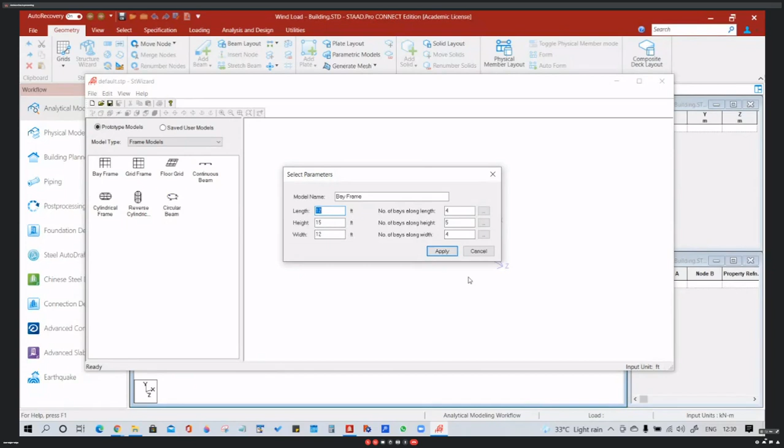You can see the bay frame here. You can drag it here. It will require the requisite parameters for creating a bay frame. So take care of that: these units are all in feet. So cancel this one. Go to the file, select units, and select meter. Then repeat that scenario. Now we are using the meter system.

So let us define a very small frame. Length of 12 meters. Okay, let it be 18 meters. Number of bays along length 3. Height, make it 6 meters. Number of bays along height is 2. And width is 12 meters. Number of bays is 3.

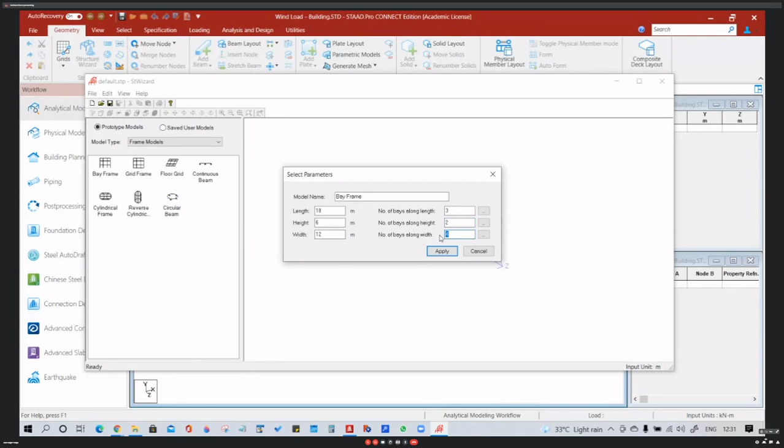So how does it look? It will look like this. Okay. If you don't like this particular geometry, you can also edit it by double clicking on this. You can raise the height up to 9 meters with a number of bays 3.

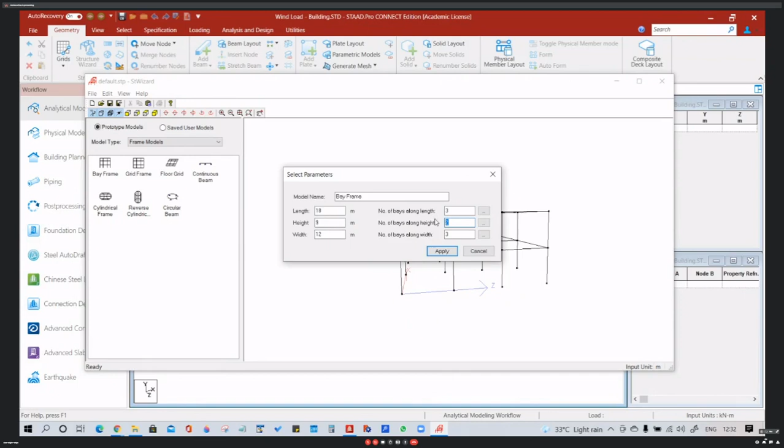So apply it, it will change the model accordingly. So this is a very simple way of creating such models. Okay. Now we have created this model in structure wizard.

Now we need to take this model from structure wizard to STAAD.Pro. From structure wizard to STAAD.Pro, we need to port the model, or we need to export the model from structure wizard to STAAD.Pro. How we can do that? We can do by using this command, transfer model. Here is an icon.

This is transfer model, or we can have the file menu, merge model with STAAD.Pro model. Those are same functions. If you click on that, the structure wizard will ask you, would you like to transfer or merge this prototype into STAAD.Pro? Obviously, you will press yes, and it will ask you at what location the 0,0,0 of the model created in the structure wizard will be placed.

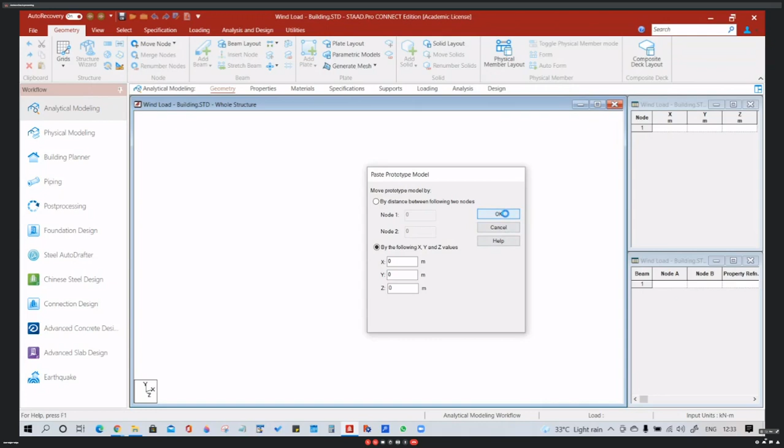So in this particular case, we can tell that the 0,0,0 of the structure wizard model will coincide with the 0,0,0 of STAAD.Pro. Okay, so that particular model is transferred in STAAD.Pro.

Okay, fine. Now we will do something with this particular model to make it a model which is not perfectly symmetric. Or better, we will first define the wind load and apply it. Then we will modify this particular model to create a different one. So up till now, it is only the skeletal structure. No member properties, no support, no loading, etc.

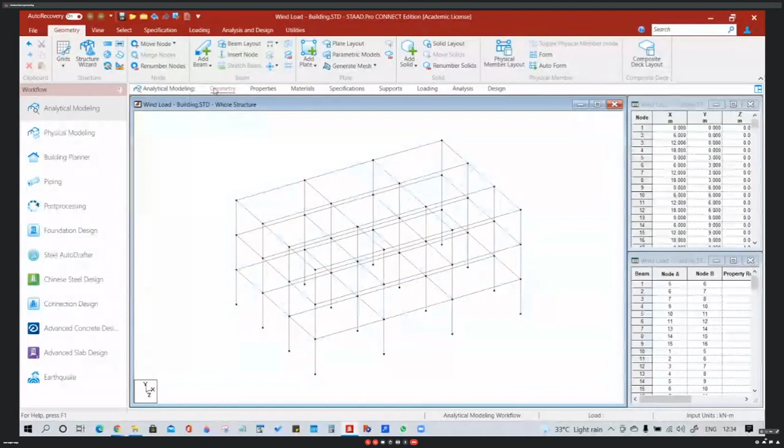What we will do? We need to define the properties. Let it be a concrete structure. We need to define the properties of the column sections and the beam sections. Say for column section, we need to define the rectangular section. Please suggest any section. What should be suitable ZD and YD value? Let's see your ideas.

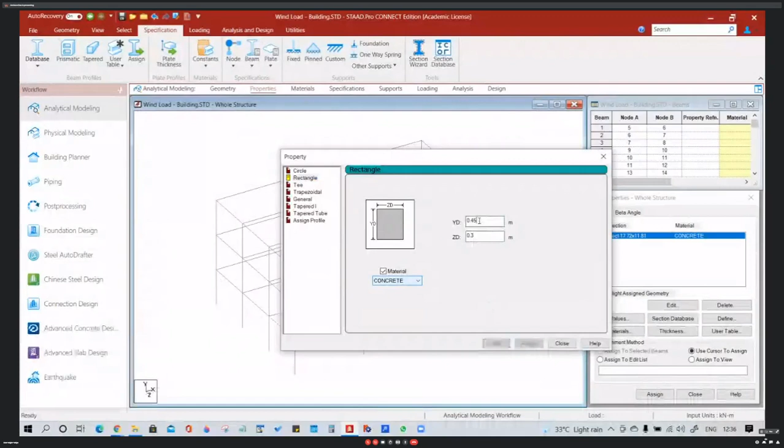What is the material? We need to define the material also, which is already taken as concrete. So all the column sections are 0.3 meter width and a depth of 0.45 meter. So we can add this one. This will take care of the column sections. And regarding the beams, take the ZD of 0.3 meter and make it 0.6 meter. So, 0.5. Okay. So we have defined the beam sections and the column sections.

So we need to assign the column sections to all the columns, and next we need to assign the beam sections to all the beams. How we can do that? We just go to the select option. Select beams parallel to Y. In a single click, you can select all the column members which are actually parallel to global Y direction.

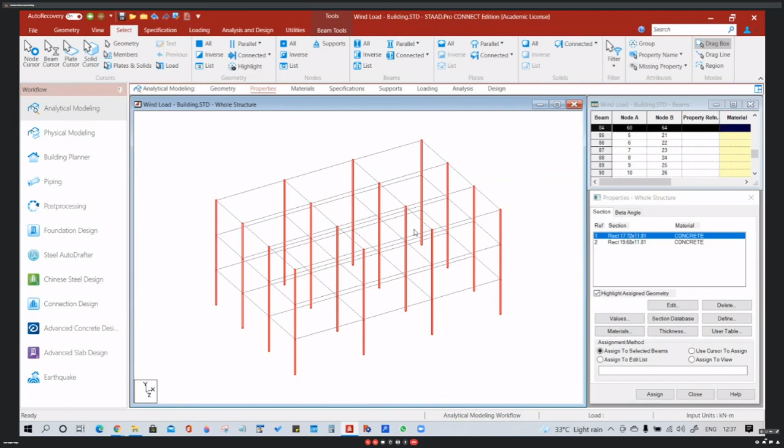Now you can assign those. Assign to selected beams is already selected. So we can assign that particular section to all the column members. We assign this one and confirm that. So now all the column members are assigned with our section of 300 millimeter by 450 millimeter.

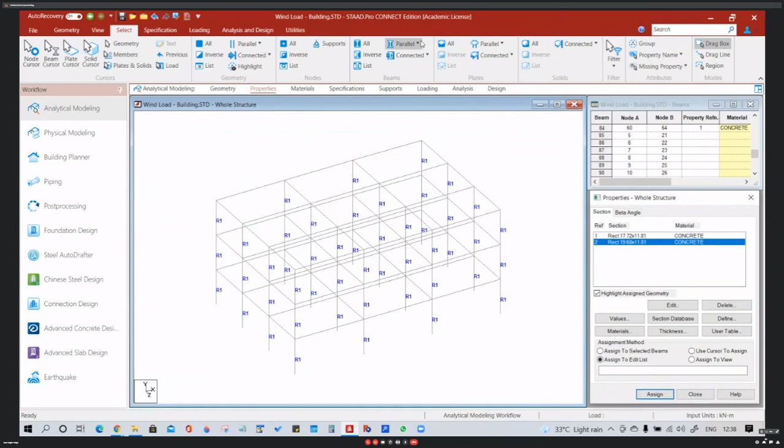Then what will happen for the beams? Now we have selected the beam section. Similarly, we select all the sections parallel to X and press Control. Select all the sections parallel to Z. So now all the sections parallel to X and all the sections parallel to Z both are selected.

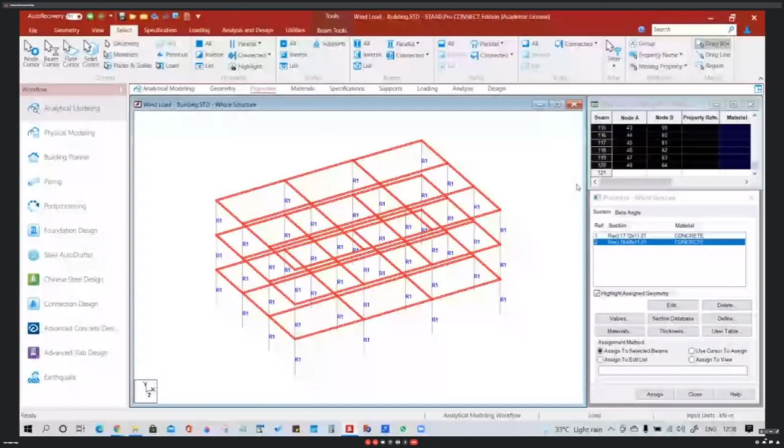And we will assign the section that we have defined for the beams to these members. Assign to selected beams is selected, we will assign this.

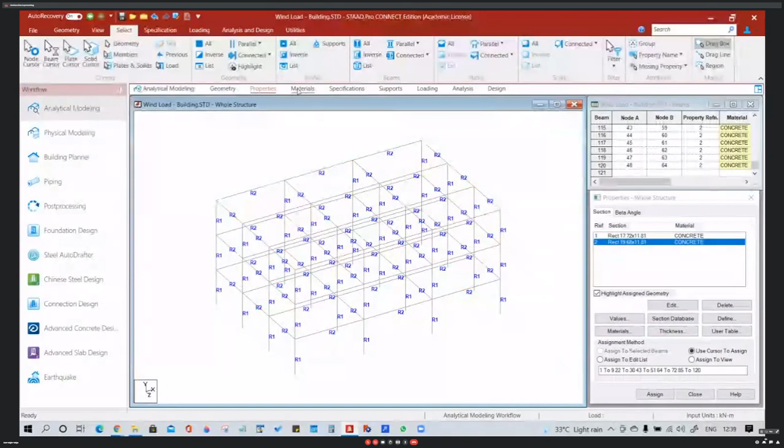Okay, so now it is done. So nothing is left which needs to be assigned. Now we go for the materials. Do we need to assign material to anything? No, because we already assigned concrete while we were assigning the section. So that is already done. Then comes specifications. We don't have any special specifications required for this particular structure.

Then comes support. We need to create a fixed support to all the base nodes. So fixed support is given. We need to add the fixed support. The fixed support is created, and what we need to do is assign this particular fixed support to all the nodes at the base.

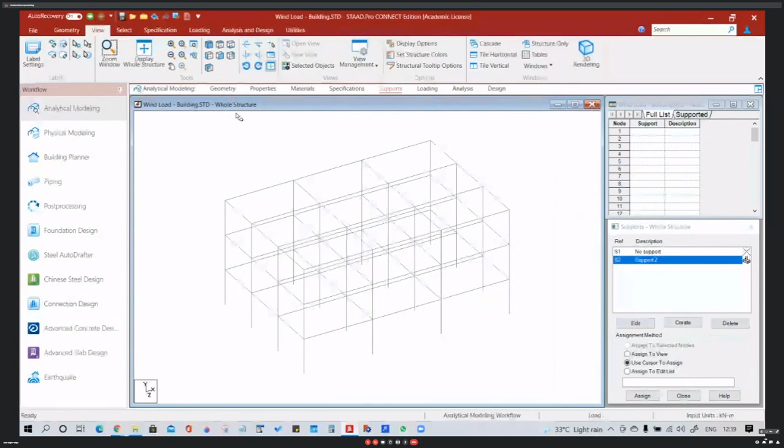I am modeling this total system in front of you because this will form a recapitulation of what you have done. So if you have any question regarding this, you will definitely ask me during this time. Okay, so we select one particular view.

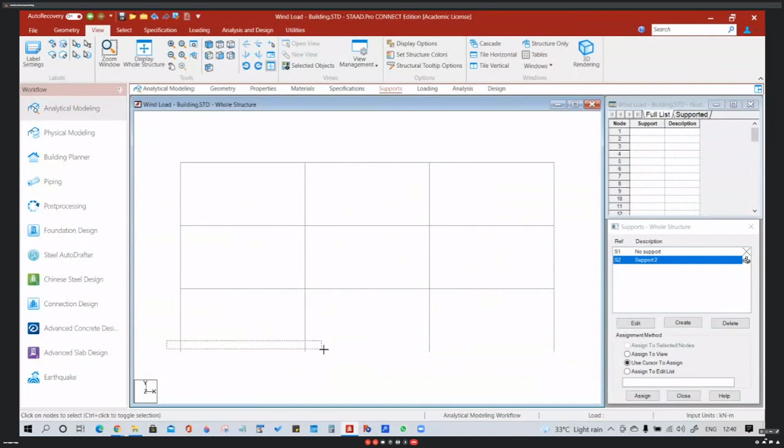Now at one go, you select all the nodes which are at the base level. You can check by changing the view. You see all the nodes at the base level are selected to create the support at those nodes. Now assign to selected nodes is already selected, and I press the button. All the foundation nodes are assigned the fixed support. So now my modeling is complete apart from the loading system.

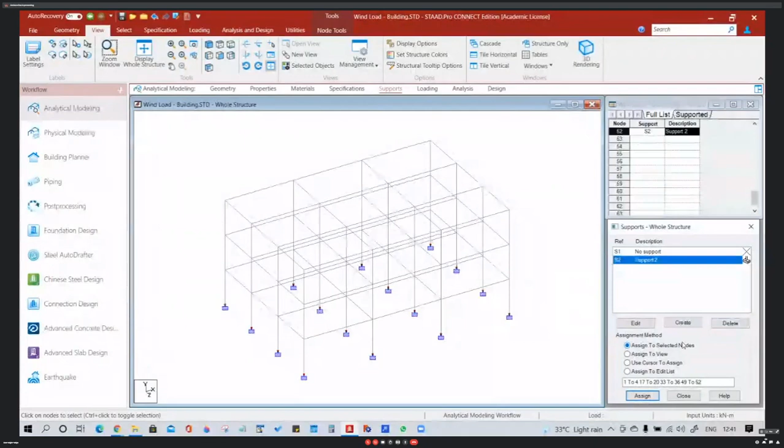So as a first load case, we can do one particular thing. Load case details. We can create one load case, a primary load case. We can add the self weight. You can add the self weight command to that. Self weight Y factor -1.

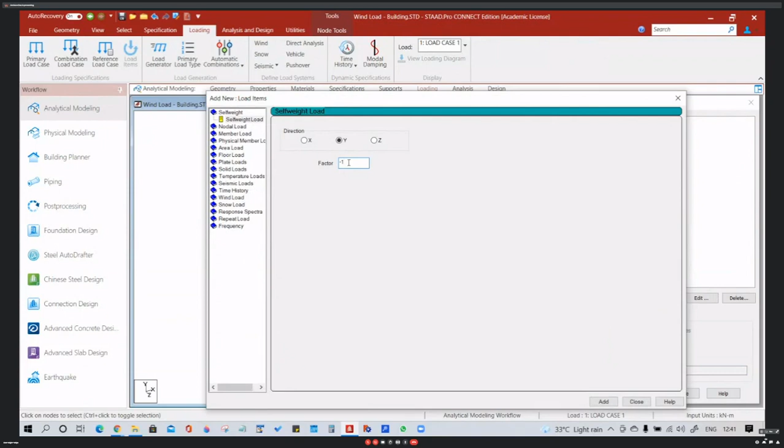So that is added. And for that self weight, you can see the small red question mark at this location. The self weight Y with a factor of -1 will be assigned to all the members of this structure. So select assign to view and then assign. So all the members of this structure will be assigned the self weight command with a factor of -1. Okay.

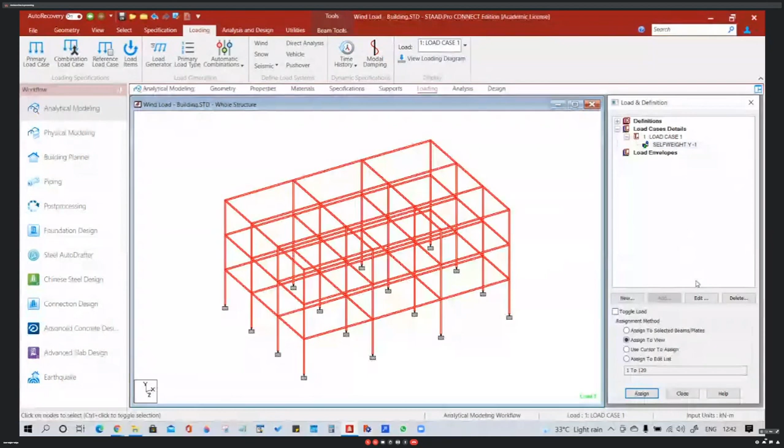Now come to our main agenda: definition of wind load and application of wind load. You can see in this load and definition panel, just above the load case details, there is one definition. This definition has all the loads that need definition.

Vehicle definition, just in a nutshell I can discuss with you. Vehicle definition is used when we are going to analyze a bridge structure or something subjected to a moving load, and we need to define that vehicle, how it rolls over the bridge. That definition is done under vehicle definition. In the dynamic analysis part, we need to define the time history loading, and the time history load is defined here.

Then wind definition, that is the definition of the wind load that will be acting on the structure. Then snow load. Then reference load definition. This reference load is somewhat different, we will discuss it later. Seismic definitions, that is when we define the IS 1893 load, the seismic load. Also, there are pushover definitions; pushover analysis, that is performance analysis of structures, is possible in STAAD.Pro.

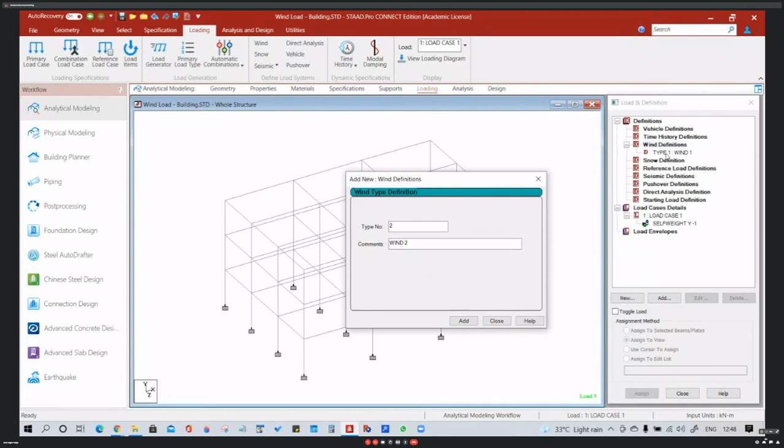Okay. So the first number, the type number, is 1. This type number is important because whenever we refer to this particular wind load definition in any other part of the input file, we will require this type number. So type 1 wind load 1 is defined, and we add this particular one. You can see on the right hand side of this loading definition window, type 1 wind 1 has appeared. Okay, so you close this, then click on type 1 wind 1 under the wind definitions and click add.

Now a dialog box for wind definitions has appeared, and we need to define the intensity and exposure for this particular wind load with reference to this structure. So in select type, another option is there, that is custom. What is there? Actually a total of 4 codes are there. One is SP code, which is a Russian code. SNiP is also another Russian standard, GB is the Chinese standard, and at the bottom, calculate as per ASCE 7. ASCE 7 is the American standard. So these 4 wind loads are already implemented in STAAD.

We use IS 875 part... which part? Can you tell me which part? IS 875 part 3. And the latest version of the code is the 2015 version. So 875 part 3 2015 is a rather new code, because the previous version was 1987, and the wind load has undergone massive change due to the change in the wind scenario over the subcontinent. So my suggestion is to have a look at the 2015 version of the code and go through its relevant clauses.

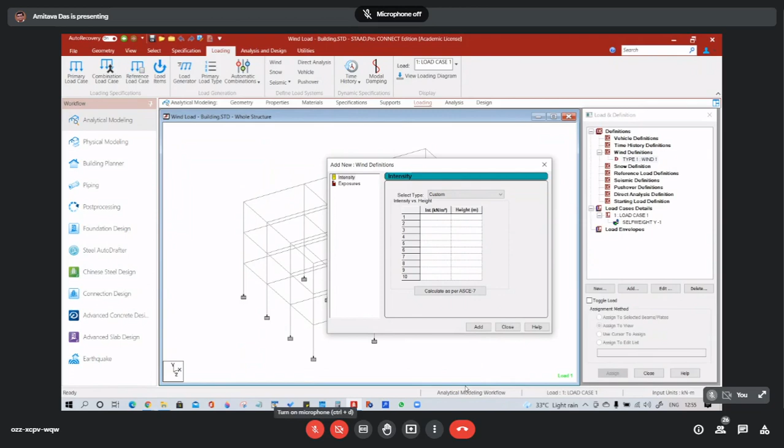Right, right. So when Amphan hit this particular state and the surrounding region, do you know what was the maximum wind speed? 120 kilometers per hour.

Around that 120 kilometers per hour or 130 kilometers per hour. That was the range. So our basic wind speed for Kolkata, our basic wind speed, not the design wind speed, was 180 kilometer per hour. So that is the basic wind speed considered for design of any structure in and around Kolkata. Okay. So first of all, 180 kilometer per hour, that is the basic wind speed.

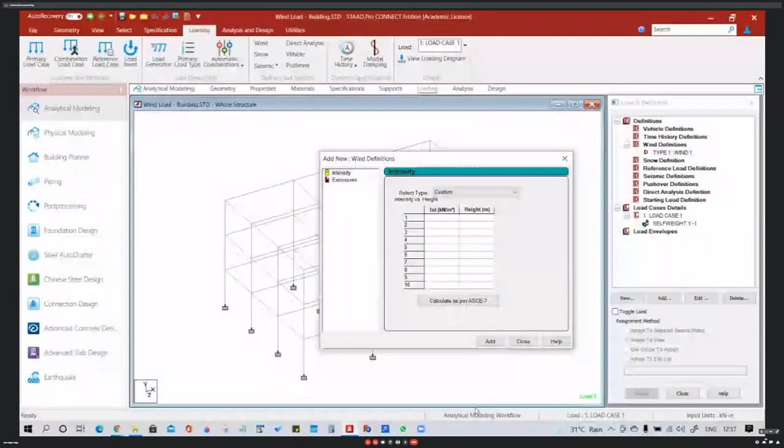But there comes one design wind speed. So design wind speed: VB is the basic wind speed, and then comes VZ. VZ is equal to K1, K2, K3 times, or K4 and K5. These are the K factors as defined in the 875 Part 3 code, and you need to go through all the definitions of the K factors. The K factors are multiplied with the basic wind speed to get the design wind speed.

From Vz we get Pz. Pz means the design wind pressure. So 0.6 Vz square is the normal equation that this particular code uses, where Vz is in meters per second, and Pz is the design wind pressure. You need to define this Pz, and you need to calculate that part by your hand calculation as per the codal provisions.

Up to this part, you use the dimension of the building. You need parameters like where the building is situated, the dimensions of the building, the surrounding obstacles of the building, the slope of the ground where the building is situated, etc., to define K1 to K5, and then from VB to VZ, and from VZ to PZ. This calculation we need to do as per the 875 Part 3 2015 code. Once you get the PZ, the design wind pressure, that value you can input here. Any queries, please raise it.

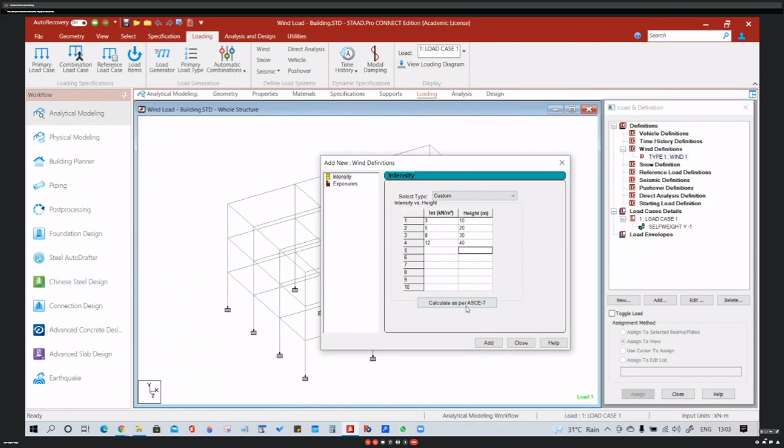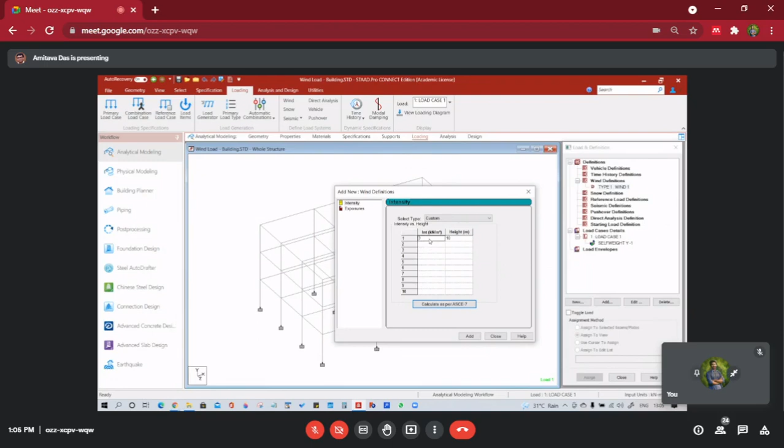a height of 10, we define the wind intensity is 3 kilonewton per meter square. This is just a value I have assumed. This 3 is an abstract value I have just taken; there is no mathematical calculation behind it. So I have defined the wind load up to a height of 10 meter. The intensity of the wind load is 3 kilonewton per meter square for this case.

Then it asks me the factor of exposure. What is exposure? Exposure factor is nothing but the presence of openings in the faces which are facing the wind. Say for example, we have some windows in the external walls. No internal walls or internal part of the structure will face the wind. Only the external walls, the frames which are external or at the boundary of the structure, will face the wind.

So presence of openings in the form of doors, windows or balconies will affect the exposure factor. Exposure means what is the percentage of the area which is exposed to the wind. As in STAAD Pro we are not going to model the panels for doors and windows, it is difficult for the software to assess the area that is exposed.

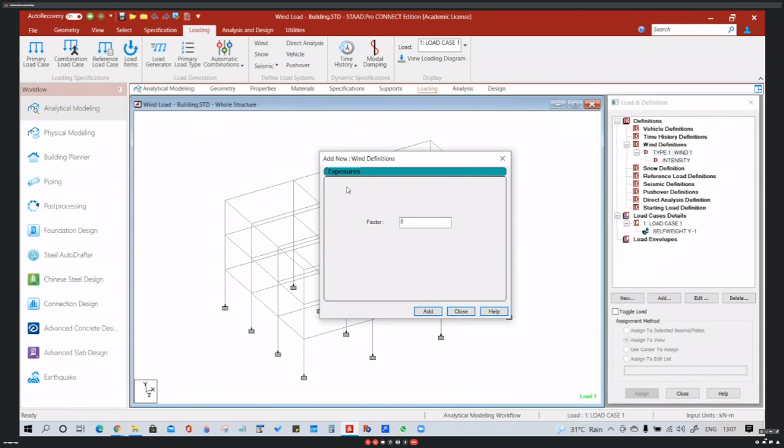Even as we know, for the area of the building where we have doors and windows, it is very difficult to calculate the percentage of the face area of the building which is resisting the wind load. So we take some average value. We can take 0.9 or 0.85 or 0.8, something like that. 0.8 is a very common value. Any value from 0.8 to 0.9.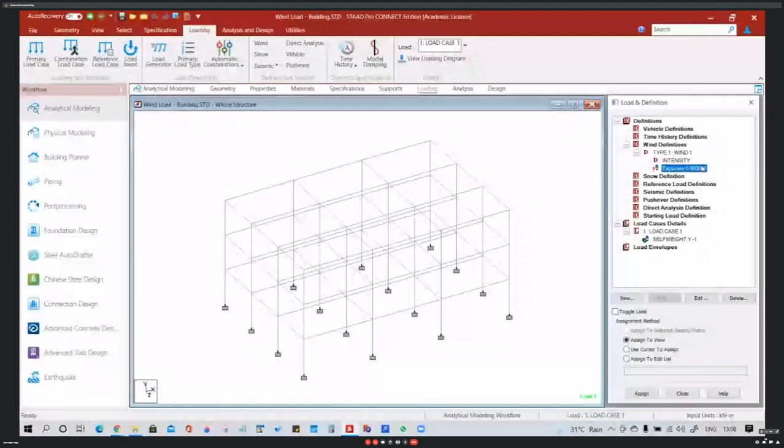Now you see the wind load, the intensity defined, the exposure is 0.9, and there is a small red question mark. So this exposure factor needs to be assigned to the points which are facing the wind. Ideally, the peripheral nodes of the building need to be assigned with this exposure factor, because the tributary area of a particular node multiplied by this exposure factor will give you the actual area on which the wind intensity acts.

So ideally, we should assign all the peripheral nodes of the structure with this factor. But for simplicity, we can assign this to all the nodes of the structure, because assigning this factor to any internal node will not affect the result. Only the external or peripheral nodes will do some calculation with this exposure factor. Any internal node will not use it for the wind loading calculation, because the internal nodes are unaffected by the wind.

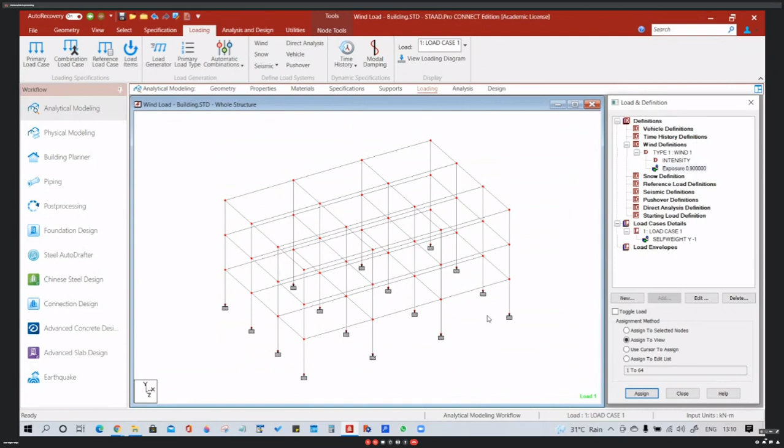Okay, so now we assign this to all the nodes of the structure with this exposure factor. You can see that all the nodes are assigned with this exposure factor. Keep in mind only the peripheral nodes will use it for the wind load calculation. Now the definition of the wind load is complete. We need to assign this wind load to some structure or to some face of the structure.

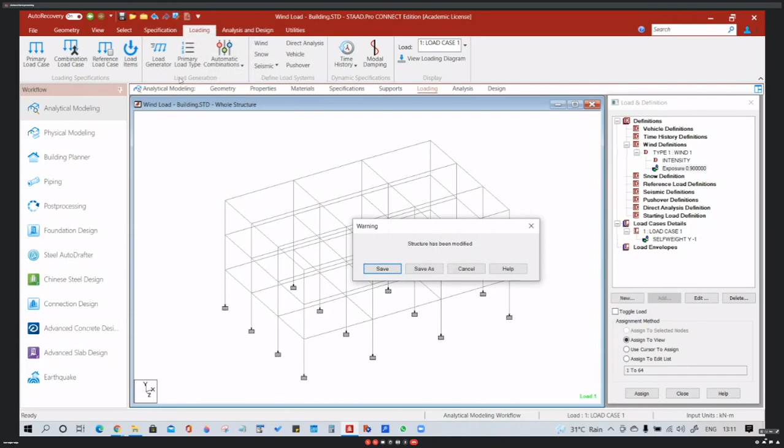So now at this point, we go to the input file, the command file editor, and check how it looks. We need to save it first. You can see that STAAD SPACE is there. Joint coordinates and member incidences are done. Material definition is done. Member property is defined for beams and columns.

Constants in the form of concrete material. Any other specifications are not done. Supports are already defined, and you see these new lines: define wind load, type 1, wind 1, intensity 3, height up to 10, exposure 0.9, joint 1 to 64. So these 4 lines are actually the wind load definition. Okay, so this define wind load defines the wind load on this particular structure.

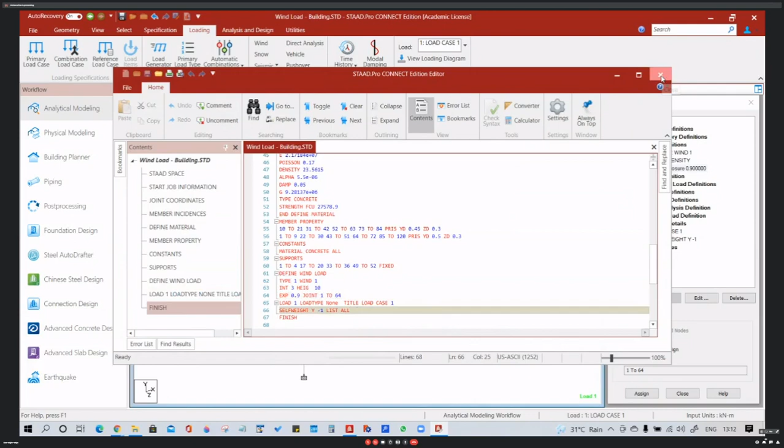Then load type, we have already defined the self-weight load, etc. Okay, we close this particular one, and our next task is we will assign this particular wind load on this structure. Okay, so we go to the load case details and add another load case. Another primary load case, that is number 2, load case 2.

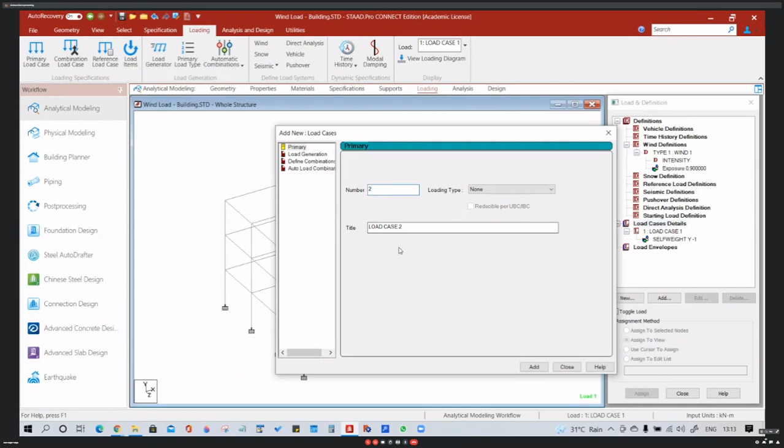Okay. We take this one and we will go to the wind load. You can see the wind load is there, and you can see the select type. Select type means if you click on the drop down box, you will see that only one type is available. That is quite normal because we have defined only one wind load. If you had defined 3 or 4 types of wind loads, then this drop down box will make available all the 3 or 4 wind load types. But in our case, we have defined only one type of wind load. That's all.

Then you see there are 4 options. One is X windward face, Z windward face, minus X leeward or sidewall face, and minus Z leeward or sidewall face. These 4 options are available. So what are the meanings of those things? Just make a note of these naming conventions. You will see a small button here, loading convention. Click on that.

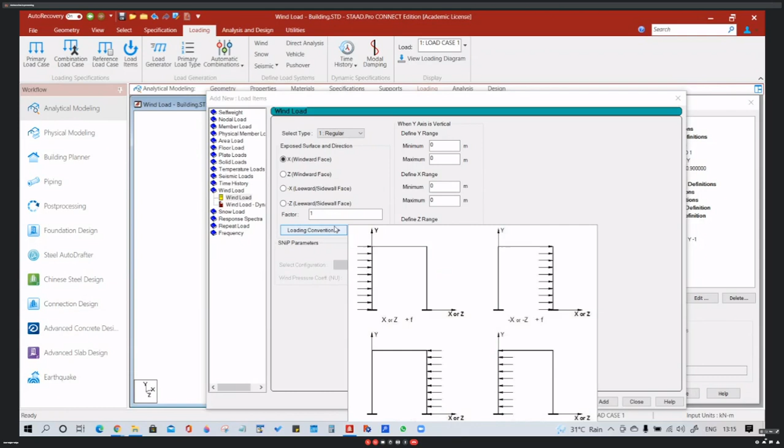So you will see that X or Z plus 1 means this is the loading condition. X or Z plus 1 means this one, and X or Z minus 1 is this one, and leeward means that is the internal. Some wind is acting from external, that is pressure, and another is suction. For suction, our definition will be minus X or minus Z. So in our case we will use X or Z plus 1 or X or Z minus 1.

In our case there is no suction because the building is guarded by the peripheral walls at all 4 sides. But from the viewpoint of a factory shed, you need that internal suction, that is minus X or minus Z with a minus factor. The right side pictures you will require when you are designing a factory shed. But for building structures, you will require the left hand side 2 pictures, X or Z with some factor, either positive or negative. Okay.

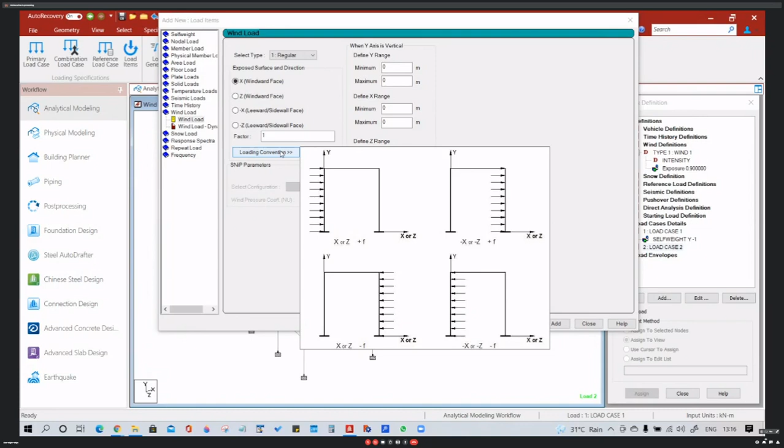Now, so X plus 1, this is one particular load, and you may or may not define these ranges, but if you define the ranges, I think

Someone's audio is not muted. Can you please mute? Hello? May I request someone whose audio is not muted? Can you please mute? Hello? Anyway.

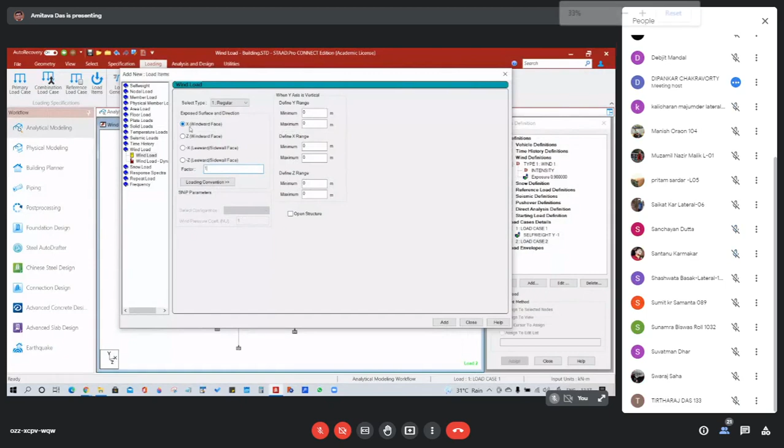Okay, so this particular load case, which we have defined in load case number 2, that is our X factor 1. Okay, then we add this particular one. We close this one. You will see from the X direction, the wind load is acting on the structure, and the concentrated loads are applied at the nodal points of that particular face.

So now you understand. See, at all the corner nodes, the length of the arrow is less. At all the peripheral nodes, the arrow is somewhat longer. And at all the internal nodes, the length of the arrow is maximum. Okay. So this is the value of the wind load. You will not be able to see the individual values unless you view those load values.

But you can have a print of those values using the print load values command, or for such building structures, you can calculate the tributary area of each node, multiply with the exposure factor and the load intensity value, and cross check the values. So that is very simple. But for complex geometry structures, that will be quite cumbersome. But the principle is the same.

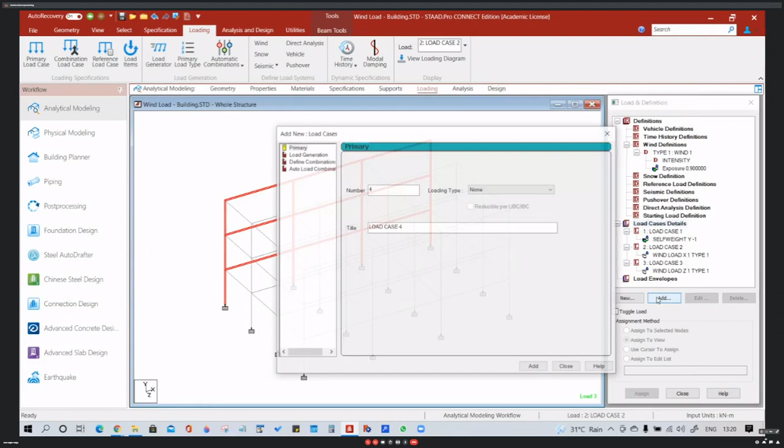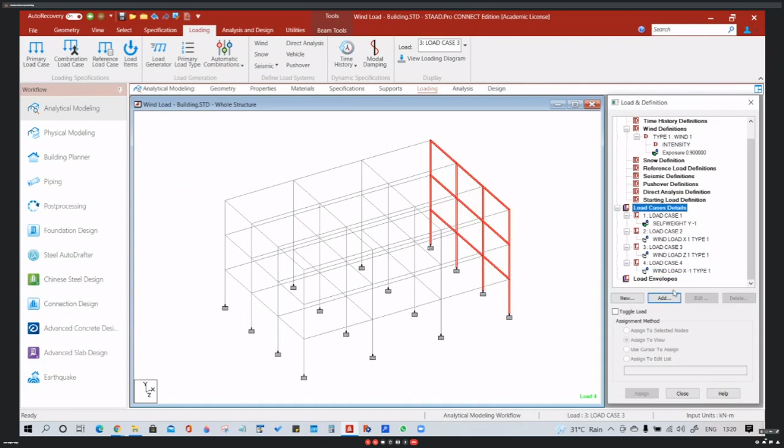Now, for the load case details, we add another load case, and for that particular load case, we add wind load X with a value of -1. What will it give? It will give you the wind load towards the negative direction of X. And we add another load case, Z with a -1. So now our wind load is towards the negative direction of the global Z.

So by using this particular wind load definition and application system, you now will be able to create the wind loads on a structure. Okay. What you can do now? These are the basic load cases. An individual wind load case will not be able to act on any structure. So you have to combine the wind load cases with other load cases. Now it is up to the load combination. So dead load plus live load plus wind load, or dead load plus wind load, or dead load plus 50% of live load plus wind load, something like that.

So as per the codal provisions, you have to combine these 4 wind load cases, one after another, with dead load and other load cases as per the directions of the load, as per the rules of the load combinations as given in part 5 of IS 875, or you can refer the corresponding IS 456 or IS 800 code clauses. Okay. So this is in a nutshell how the wind loads are generated, how the wind loads are defined, and how the wind loads are applied on a small building structure.